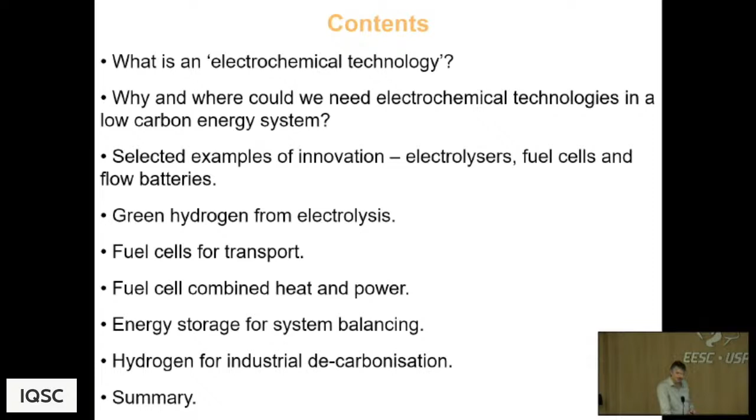So what is an electrochemical technology? And I'm going to talk about it in the context of fuel cells. Now, a number of you here in the room work on fuel cells, so my apologies if I'm going to tell you things you already know. But we'll start with the chemistry and then try and work through to the technology. And a lot of you here work on catalysis, and of course catalysis matters.

So an ion conducting material, which is the electrolyte, and two electrodes which are in contact with that ion conducting electrolyte, where we have charge transfer reactions. And this is where the electrochemistry happens. So to take the PEM example with hydrogen, obviously hydrogen here is our fuel. It's coming in on what we call the anode.

And there's a charge transfer reaction down here in which, in a catalytically active region, the hydrogen molecule will form protons and electrons. And those electrons can be carried away through a current collector, and the protons will transport across the membrane, provided the membrane is a proton conductor. So obviously here we're using proton conducting materials.

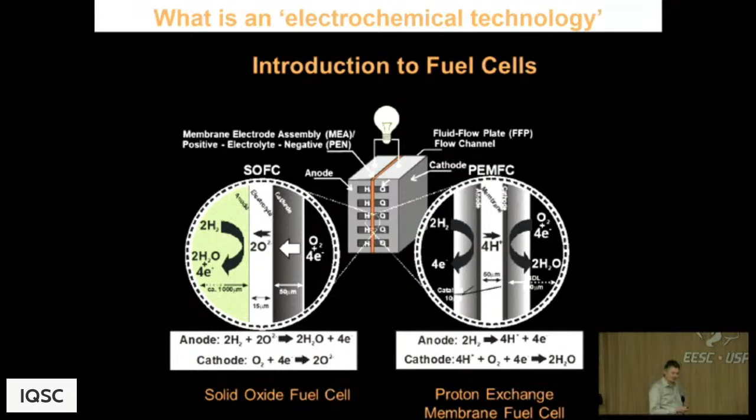An integrated system that you can use as an end user who doesn't really care that it's a fuel cell. They just want something that, in this case, will produce power efficiently from a fuel and work every time they switch it on. They don't really care, by the way, what the catalysts are. They just care what it costs and that you can make it the same each time. So, of course, in the science labs, we care a lot about this. And in applications, we care a lot about this. So you need an integrated perspective. So when I'm talking about the subsequent technologies, ultimately, this is where we need to get to with all of them, some equivalent of this.

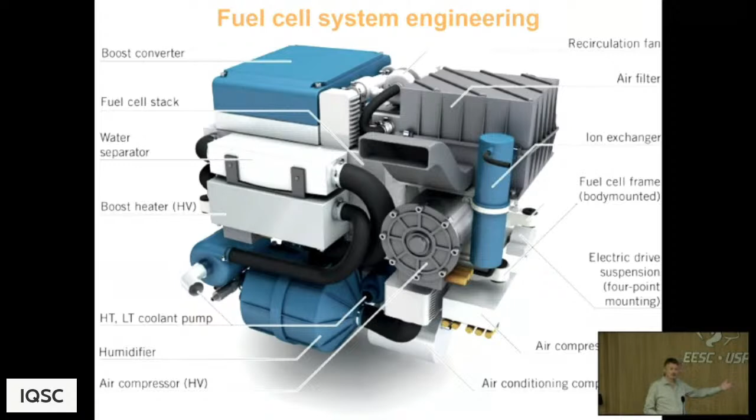Okay, so why does it matter? So I spent a lot of my career of late, less so now, trying to persuade people that these technologies are important. Because for a long time, people haven't really felt that they were important. And why actually are people now getting interested? So this is the UK energy system. Just to talk it through, this is energy in gigawatt hours per day.

The UK is a small place, don't forget. So this is gigawatt hours per day. This is time by year. This is all real data. It's put together by a colleague who does really nice work in this area at the University of Birmingham, Grant Wilson's team. And this is the flow of electricity through the UK energy system, which is this squiggly line at the bottom.

You probably can't read that number there, but in 2022, the UK's electricity was 39% gas and 1.5% coal, but everything else was low carbon. So we've actually made good progress in decarbonizing this, but you can see that sadly, it's the least important part of our energy system in terms of the amount of energy flow.

But it's probably the most important part of our system in terms of the potential for decarbonization. So that's electricity. You see some seasonal variation. So this is our winter, right? And this is our summer. So there's a little bit of a shift between summer and winter.

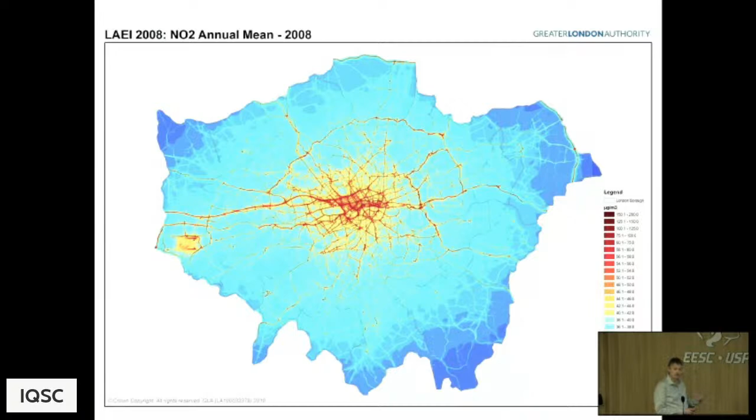So these are coming entirely from transport, right? These are all transport-related NOx emissions off internal combustion engines. And so trying to move away from internal combustion engines is not only about carbon, it's also about air quality. And there's huge, increasing amounts of policy intervention going into driving these changes.

Okay, so one of the things when you talk about electrochemical tech is the topic of hydrogen. So hydrogen is potentially a low carbon fuel, a low carbon energy carrier. I'm going to talk more about it. And of course, we make hydrogen commercially today. We make it at a large scale.

The world makes about 100 million tons or so of hydrogen a year, 98% of it made from natural gas or coal. All of it effectively for either making ammonia as a fertilizer or chemical feedstocks like methanol or refining petrochemicals. It does not make hydrogen as an energy carrier, it makes it as a chemical feedstock.

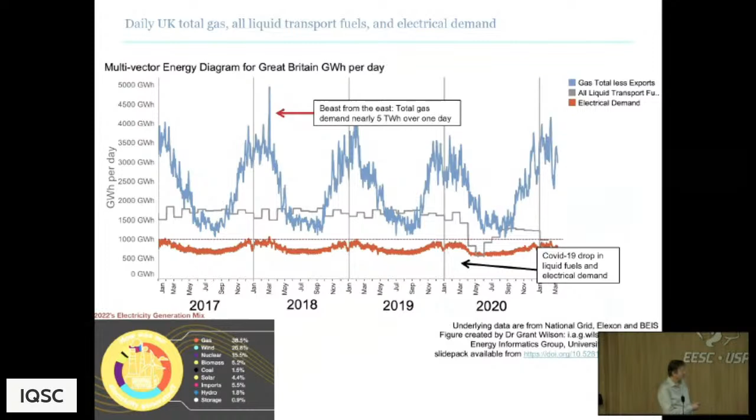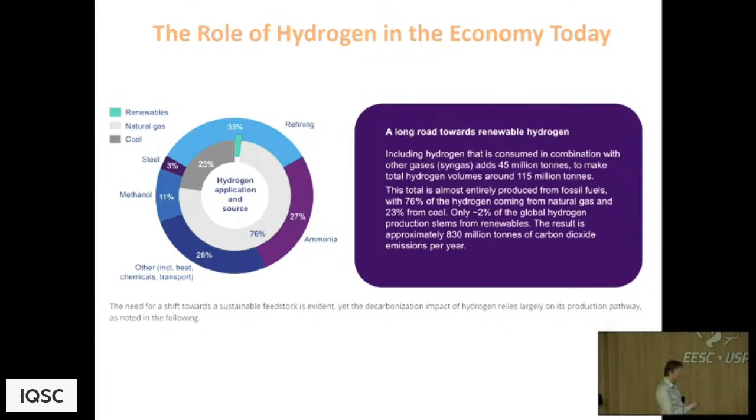But if we're going to want low carbon molecules in here, as well as our natural gas or our fossil fuels, the next easiest low carbon molecule to make is hydrogen from splitting water by electrochemistry. It's the electrochemistry I'm going to focus on, but you can make it other ways as well. So this is a color map of all the different routes to hydrogen.

I have to say, given the conversations here in Brazil, I don't think there's a color for ethanol-derived hydrogen. So we need to think about a color for ethanol. Or someone has, it's just not on this picture. So what's the color of hydrogen if it's made from ethanol? I have no idea. Because strictly green hydrogen is made from renewable power, but it could equally be made from ethanol. Anyway, interesting question.

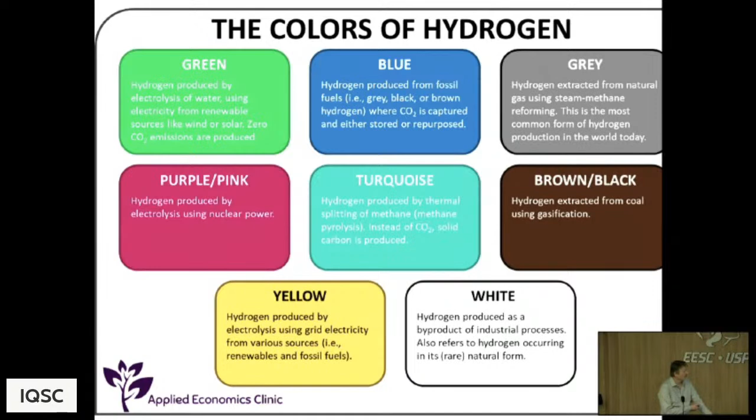So there are many different colors of hydrogen. The two most commonly people refer to in the context of low carbon hydrogen are green, which is largely by electrolysis, or blue, which is largely from natural gas with carbon capture and storage. So this is zero carbon, arguably. We'll look at that in a moment, and this is low carbon. But you can make it by all sorts of other routes, and there are lots of different colors, but those are the main two.

So once we start thinking about hydrogen as an energy carrier, or indeed any fuel as an energy carrier, we have to think about its carbon intensity. And why is that? Because hydrogen, other than in very unusual circumstances, does not exist naturally. It's in the form of water, it's in the form of methane, it's in the form of hydrocarbons, and you have to put energy in to separate the hydrogen from its carrier, right? You have to put energy in to make hydrogen from water, for example.

So this is some work of an organization trying to create a green hydrogen standard. I just think it's an interesting example for us all to have in mind. So they've defined a green hydrogen standard of 1 kilogram of CO2 equivalent per kilogram of hydrogen, bearing in mind that today it's around 10 kilograms of CO2 per kilogram of hydrogen if you make it from natural gas. So today's hydrogen from natural gas is about 10. And so this is 1. So that's the target.

But then you have to start to think about, well, what are we including in that, right? So this is suggesting all of the energy input streams should go in, and all of the implications of the production processes should go in. But it doesn't include upstream emissions, and it doesn't include downstream emissions. But in practice, from a societal perspective, we need to think about upstream and downstream emissions, as well as the energy inputs, as well as the processes.

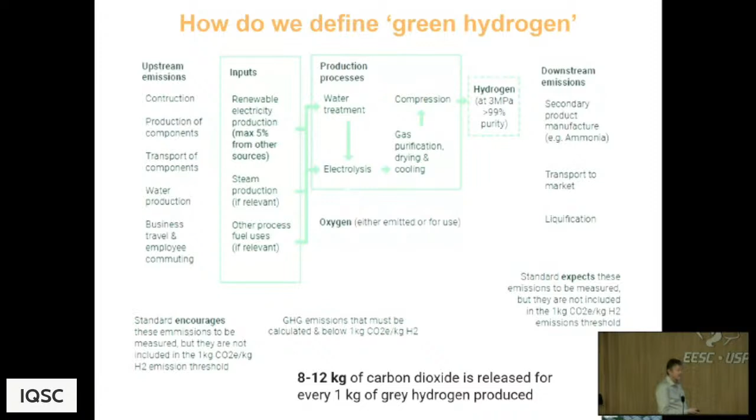So when we talk about something being zero carbon, it's never actually zero carbon, because there's so many other input streams that are going in. But it's important, particularly as scientists and engineers, that we're very open and aware of these energy and mass balances when we're starting to think about challenges around sustainability. So that's why I think this is quite a helpful slide. And this is a paper we wrote some years ago about the role of hydrogen in the economy tomorrow.

So if you go back to the 60s, John Bockris gave a talk at General Motors where he spoke about the hydrogen economy, and there was lots of excitement in everything being powered by hydrogen, and you wouldn't need any other form of energy carrier. The reality is that will never happen.

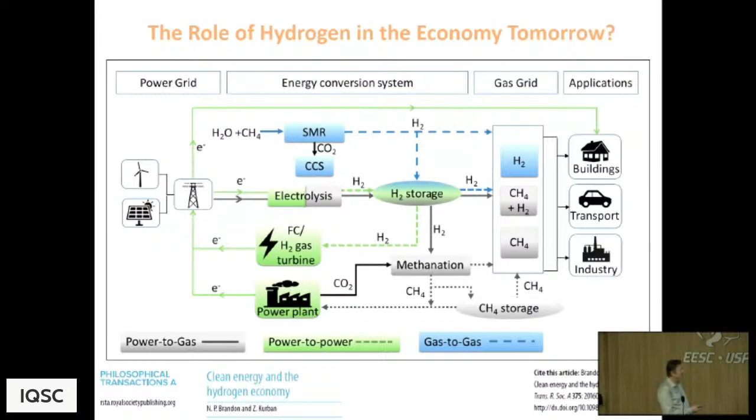That is not what it's going to be, but we will see increasing amounts of low carbon molecules, hydrogen or its carriers like ethanol or methanol or ammonia, in the energy system in support of electrification. And it's this partnership between electrification, because if you can electrify, that's what you should do, and low carbon molecules where you can't electrify because it's not cost effective or functionally possible, or the electricity is being made where you don't need it, for example, in the middle of a desert, when you need to start to think about making molecules. So this is a cartoon of the role of hydrogen in the economy rather than the hydrogen economy. Okay.

Just talk a little bit more about this before I go back onto my electrochemistry. I gave this slide in September, not here, but at the Sao Paulo campus in Sao Paulo City. I thought it's worthwhile rephrasing it. And this is about the costs of grey and blue hydrogen. So this is hydrogen from natural gas. And obviously if you're making hydrogen from natural gas, it will cost more per unit energy than the natural gas, right? It's got to, because you've done stuff, separated out CO2, stored CO2.

This all costs money. Historic gas prices in Europe, 20 euros per megawatt hour. We'll talk about where gas prices are today in a moment. And obviously the price of the hydrogen goes up as the gas price goes up, okay? About 2 euros per kilogram at 20 euros per megawatt hour. This is the natural gas prices in Europe. When I last came to Sao Paulo, it was September last year, and we were about the peak of over 250 euros per megawatt hour relative to the historic of 20. So we had over 10 times increases in gas prices in Europe.

If you look at the energy dependence in the winter in Northern Europe and the amount of gas we use, you can see the pain point that hit everybody in Northern Europe this winter. We didn't run out of gas, but it's been a very expensive winter. In the UK, which is a relatively wealthy economy, the government have provided direct subsidy to everyone to help them meet the cost of their energy bills this winter. So it's been a big deal.

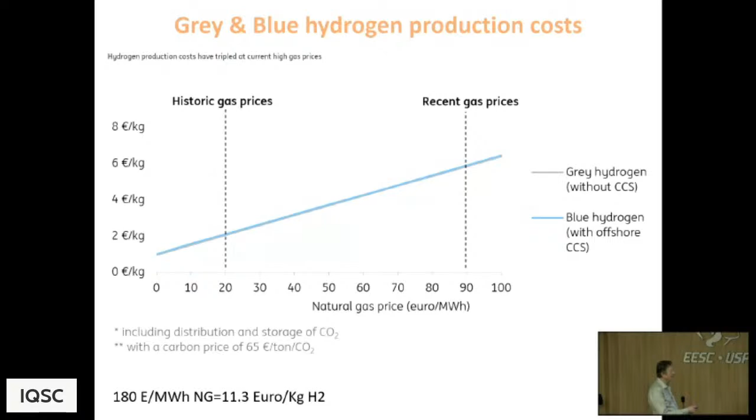If you're looking at historic power prices, you can see we're about 4 euros per kilogram for green hydrogen. And that's why when you read things, people say, well, look, green hydrogen is great, but it's a lot more expensive than blue hydrogen. Well, that's true, except when the gas price goes up to 50, you're now at 4 euros per kilogram, which is where you are with green today. Now, the green hydrogen price, therefore, is going to be heavily advantaged in countries with low-cost renewable power. And that's one of the reasons you're seeing the Middle East and Australia make huge investments and bets on green hydrogen. You'll see the same in Southern Europe, in Spain, in Portugal, where they have very low-cost advantaged renewables.

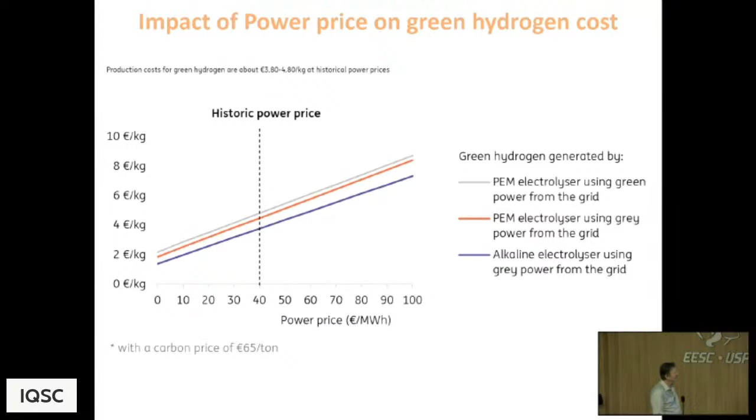So there are some really interesting geopolitical questions around who's going to be producing this in the future and where it will be produced and how you move it around the world and so on. Okay, so there we go. Let's dive into some technology stuff. Okay, so I'm not going to spend a lot of time on these, but just to give some flavor, right?

So alkaline electrolysis, we're going to talk about electrolysis. So electricity in, hydrogen out, water splitting. Alkaline electrolyzer has been around for 100 years, very mature. You can buy a 100 megawatt system and go and put it in a desert in Saudi, which people are. So it's a mature technology.

It relies on this kind of potassium hydroxide, porous diaphragm soaked electrolyte membrane. Because it's porous, one of the challenges with this technology, you can't make hydrogen at pressure very easily because you can't manage the pressure drop across this porous membrane. It's about 65% efficient. This is a kind of flow sheet, lots of balance of plant, takes up a lot of room, but it's the cheapest form of technology today and available at scale.

PEM electrolysis, relatively new, comes effectively quite substantively derived from PEM fuel cells, but not the same. Again, has these proton conducting membranes, has to have catalysts in it. These electrodes are catalyzed. These catalysts at the moment are quite expensive materials and they're quite rare materials. And I know that people here and elsewhere around the world, of course, are working to find replacements.

So platinum on the hydrogen side, iridium and ruthenium on the oxygen side. Iridium is the rarest metal in the world. So, you know, there is a concern about cost and there is a concern about material security.

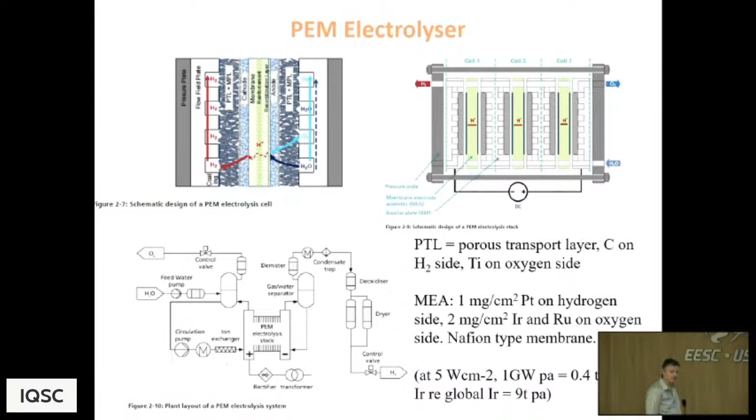And then the technology I work on, I'm very interested in, which is high temperature electrolysis. So we're now talking about the electrolysis of steam. This is not a mature technology. You can't go and buy one. But the motivation here is all around the thermodynamics.

So if we look at temperature, the Gibbs energy, and if you remember earlier, I said that the Gibbs energy is related to the voltage you produce from a fuel cell. It's also there for the voltage you need to put into an electrolyzer. So as the temperature goes up, the Gibbs energy goes down, which means you need less electrical work to split water, compensated with heat. Still need the same amount of energy because the enthalpy hasn't changed very much.

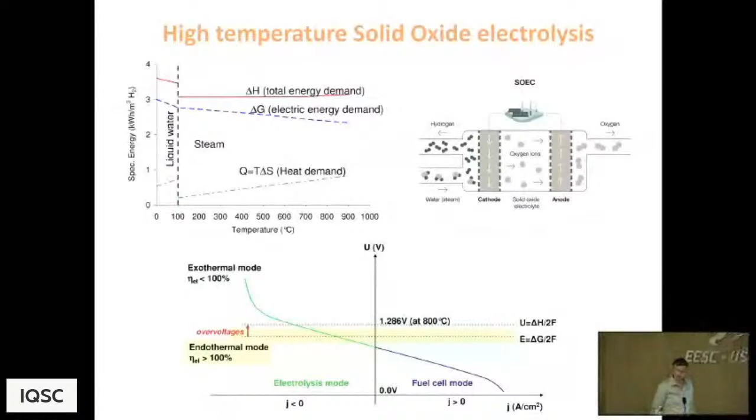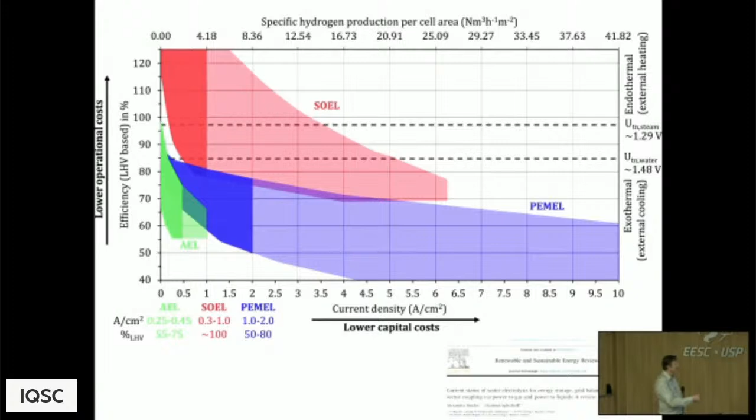This is a paper from a German group, which I quite like to reference, and it paints a picture of these different technologies. So this is alkaline electrolyzers, conventional alkaline electrolyzers. There's a whole field of alkaline membrane electrolyzers, which is very interesting, but they're not on here. PEM electrolyzers and solid oxide electrolyzers. This is efficiency. This is current density.

So current density, higher current density, smaller bits of equipment should be cheaper. Efficiency obviously lowers your power consumption. That matters because 60 to 80% of the cost is the cost of the power. So if you can be more efficient, that makes a big difference. So the reason we're interested in high temperature electrolysis is we can get north of 90% efficiencies, already demonstrated by people like Sunfire in practical systems, close to 90%.

In principle, now we have to be careful here with our thermodynamics, you can get over 100% efficiency. And of course, you can never get over 100% efficiency. It doesn't make sense. So this is effectively... it's correct, but it doesn't allow for the heat.

So to be over 100, we've effectively got an endothermic water splitting reaction in which we're injecting additional heat to balance that endotherm, and that gives you an apparent electrical efficiency of over 100%. Total efficiency, of course, can't be over 100%, but you can recuperate heat effectively to displace power. But even without those tricks, you get very high efficiency, right? So it just paints you a map of the different technologies and their pros and cons.

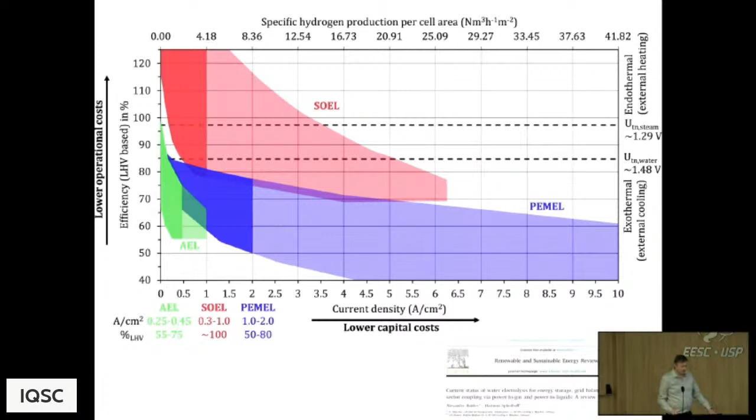So I'm going to talk a bit about solid oxide electrolysis because it's the area I work on. And I know it's also an area of interest in general here, with some work going on solid oxide in Brazil and at USP. And you've got three broad types of technology when you talk about solid oxide. So these are the ceramic devices, right, to remind us. So in all of these cases, you have an electrolyte, which is this brittle ceramic material. It's an oxide ion conductor.

So when we're trying to think about solid oxide devices, we have to be really thoughtful about what our electrolyte is, and there aren't that many choices. And because it's a ceramic, it's brittle. So they don't bend. They don't take strain very well, they crack. So we have to think about how we engineer this ceramic to be mechanically supported. And there are three approaches to this.

The most common one is to use what's called the fuel electrode, the anode in fuel cell terms, it'd be the cathode in an electrolyzer, but this electrode that's on the hydrogen side is the mechanical support. It's a porous mixture of metal, usually nickel, and the electrolyte. And then a thin, like 10 micron thick, electrolyte, and then an air electrode. That's called an anode supported cell, and that's probably the one that most people are developing around the world.

Then you go to an electrolyte supported design. Here the electrolyte's about 10 microns thick, here the electrolyte's about 150 microns thick. Human hair is about 100 microns thick. But at 150 microns, it's strong enough to support its own weight. This is the type of technology that Bloom use in their solid oxide fuel cell, for anyone who follows that. This is a FuelCell Energy type technology. And that's okay, but of course, at 10 times the thickness, it's got 10 times the resistance. And you've got a lot of relatively expensive material.

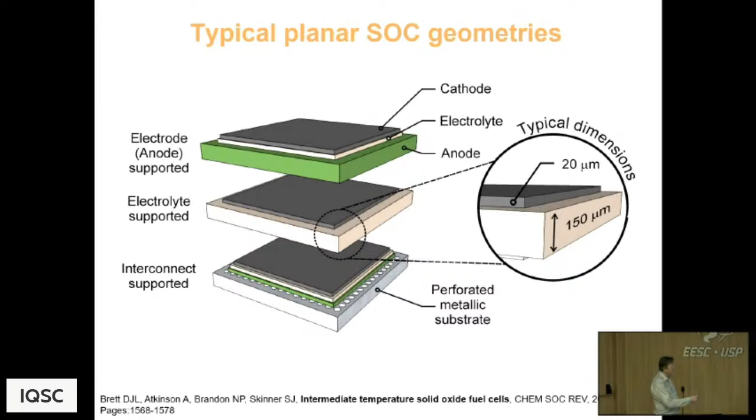And if you look at a cross section through, this is just a sort of generic electrolyte supported cell. So this is your sort of 120 or so microns electrolyte. Your air electrode, which tends to have a couple of different microstructures, high surface area where you want the catalysis, coarser where you want the current collection, and a fuel electrode, which again has high surface area where you want the catalysis, coarser where you want the current collection.

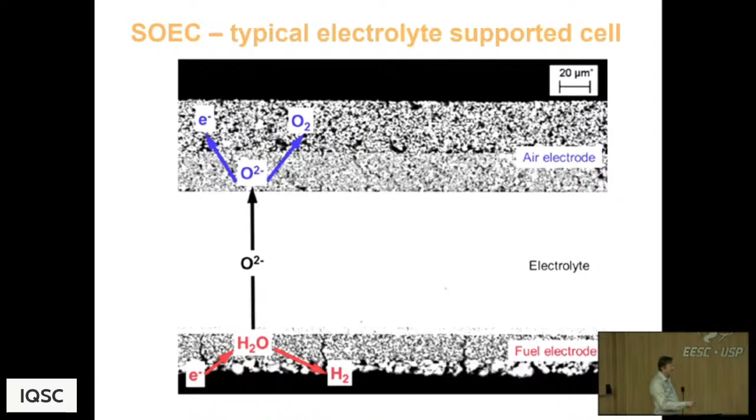We called it Ceres because it uses doped ceria in the electrolyte, and that's where the Ceres name comes from, who's also the Roman goddess of grain and life. So some simple geometries, and that's the core patent, and we created a business off that, and we went off and raised money. So that's the business that's now worth about 350 million pounds. Sadly, I own almost none of it by now.

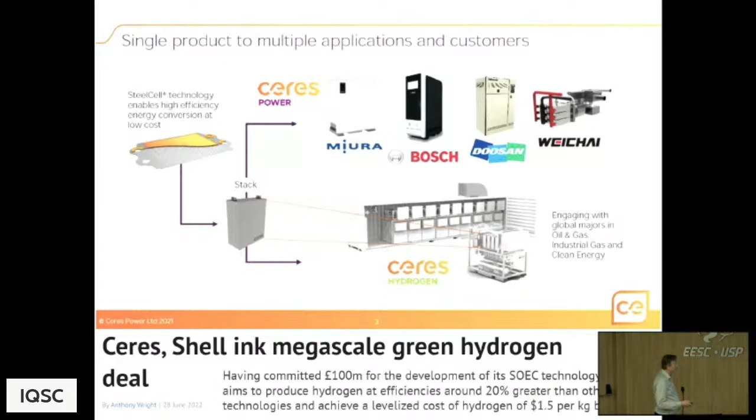And most recently and relevant to the electrolyzer story is that they're developing an electrolyzer variant of this as well, and it's public knowledge that they're putting a 1 megawatt machine into India in partnership with Shell at the moment.

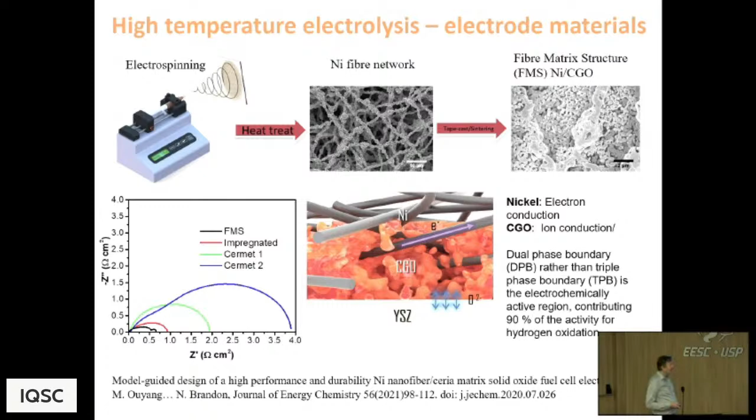In terms of what we do in my group, in our research, we remain very interested in some of the fundamentals and how you continue to evolve the materials. So we're doing things like electrospinning to produce interesting fiber structures, which we think are much more robust, particularly focusing on electrolysis mode, where you can have problems with nickel migration at the high steam concentration. So we're interested in developing novel fibrous structures for these applications, which we continue to work on today.

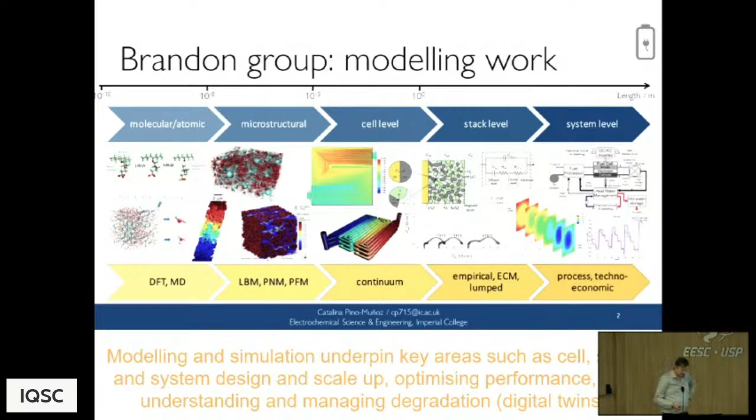Okay, conscious of time, I shall march through some pictures on transport. So this is our Toyota Mirai, which we've had at Imperial. Toyota have recently taken it back. I understand that USP are going to get one of the new Toyota Mirais, which I look forward to seeing. I don't know if we're getting one, but you're getting one.

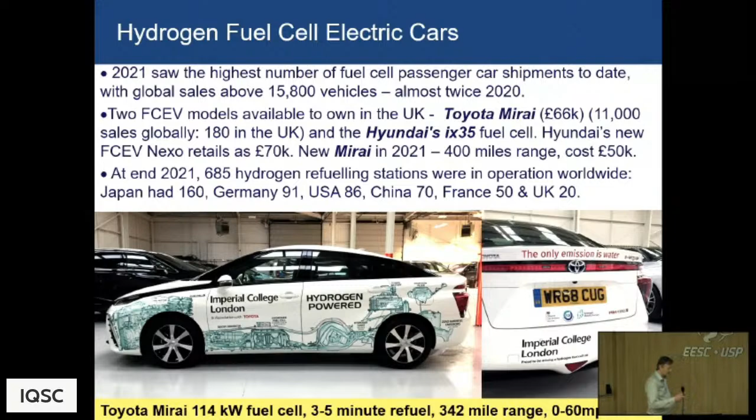But I have to say, light-duty transport is not the cutting edge of hydrogen for transport at the moment. I think battery electric is the cutting edge. Let's see where hydrogen and fuel cells for light-duty transport get to. But batteries are a tough competitor. But I do think as the vehicle size goes up and the amount of energy you need to carry on the vehicle goes up, then hydrogen fuel cells, or fuel cells in general, become a really attractive solution for electrification.

Buses, particularly public buses in Europe, noting the issues around air quality, are of growing interest. Hard to do with electric, definitely possible with hydrogen fuel cell.

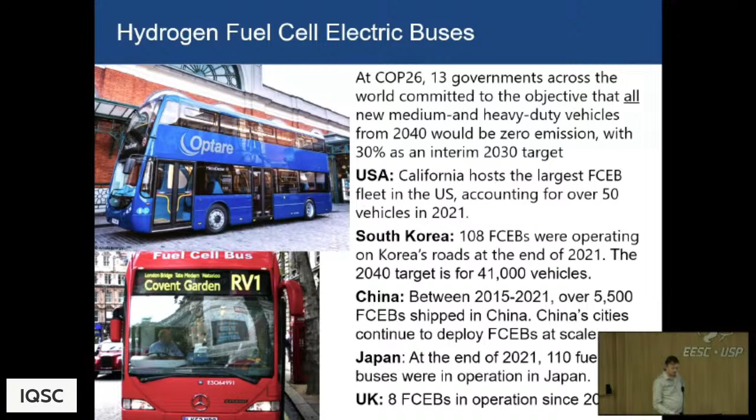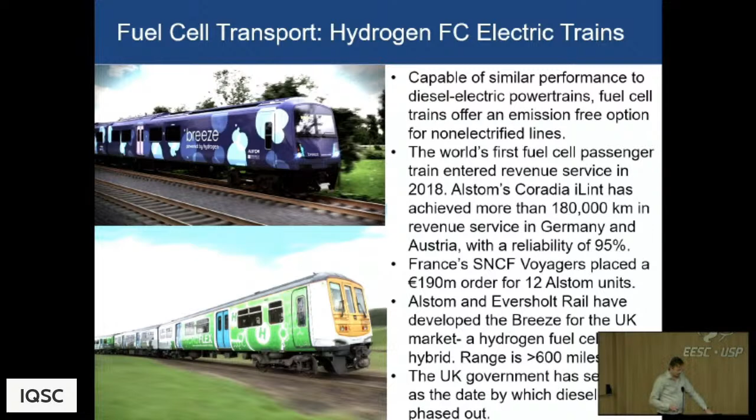Trucks, so heavy-duty vehicles which need high amounts of energy. Again, there are companies seeking to electrify trucks with batteries, but there's an equally fierce competition going on about electrifying trucks with fuel cells.

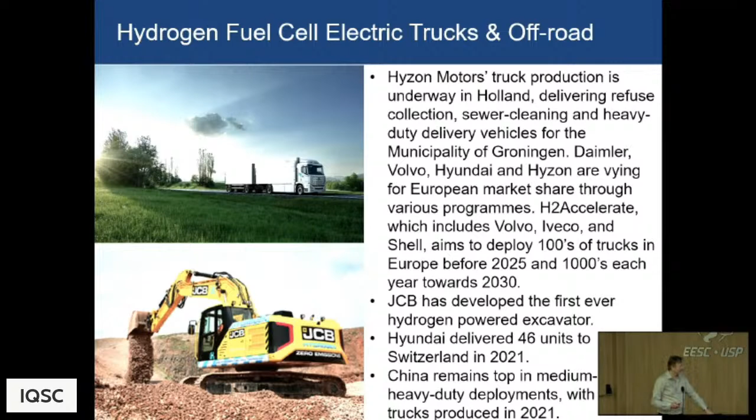And indeed there are companies looking at hydrogen combustion trucks, not electrochemical tech, which produces lots of NOx. I don't know if it's the right answer, but obviously it's an area people are looking at. So heavy duty vehicles are a really interesting space.

And then maritime. I was in Singapore a few weeks ago, and there's huge interest in how you decarbonize shipping. That has to be done with a low carbon fuel. You can't do it with batteries beyond some small inshore craft. So what is the future of shipping fuel? Whether it's hydrogen or ammonia or methanol; we should also consider ethanol, but no one is at the moment. A really important space.

Someone gave me the statistic, and it was Shell that gave me the statistic, so I suspect it's broadly right, which is that the 16 largest ships in the world consume the same amount of fuel as all of the world's cars. So a very big energy consumer.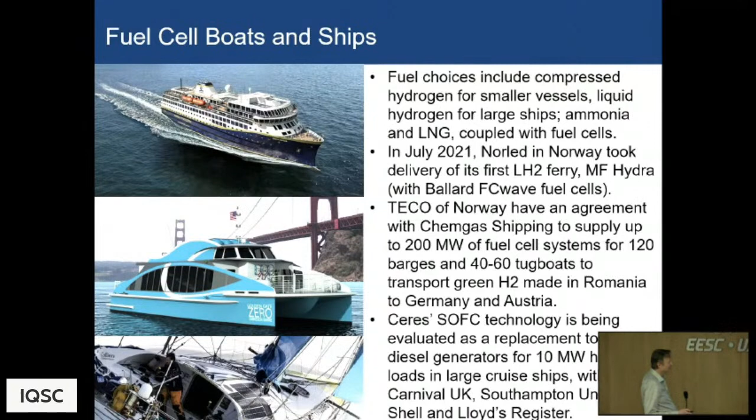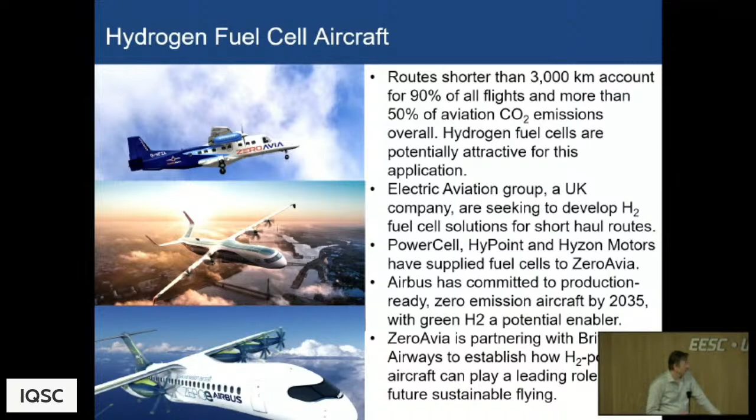And then, of course, the toughest space of all, which is aviation. What are we going to fly around the world in? It's not going to be batteries, so it's got to be a fuel. Is this where we make synthetic fuels? Because all synthetic fuels are made from hydrogen anyway. So we're doing some work with one of these companies in the UK developing hydrogen fuel cell solutions.

Where's the innovation in fuel cells? My colleague Anthony Kucernak was here a few weeks ago. He may have spoken about his work with Bramble, which, it's not my work, but I think it's a really interesting idea where you take printed circuit board technology and make fuel cells using it. Easy to say, hard to do, but it's a really neat idea.

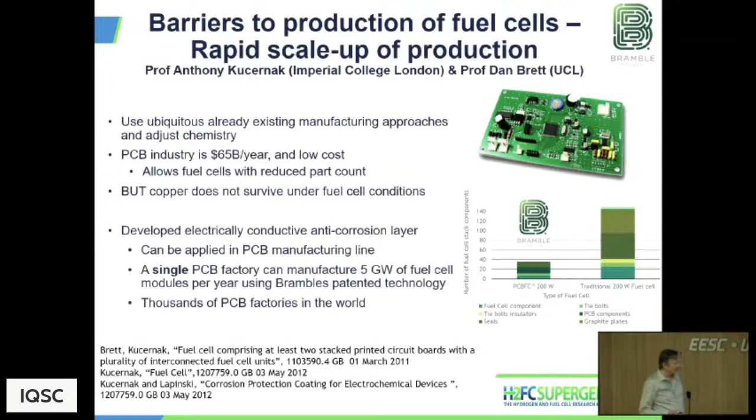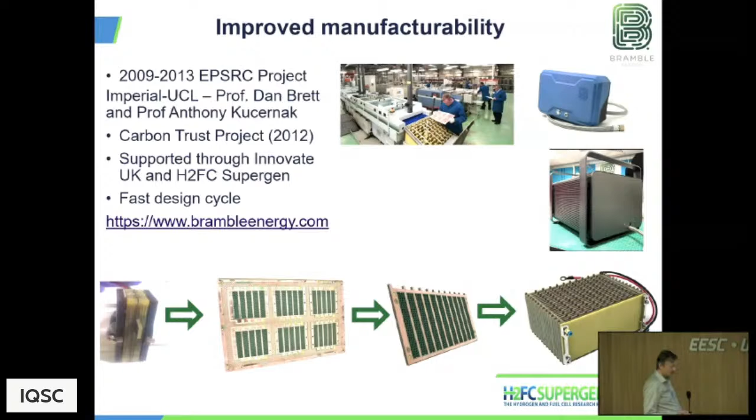These are his slides. I think it's another example of how you take breakthrough ideas in a laboratory concept, which give you manufacturing advantages, and take them into commercialization. Recently they've raised a very substantive amount of money to take that technology forward. So it's a really interesting approach.

I have to, of course, cite the project we're working on here in Brazil with Shell as well, which is looking at solid oxide fuel cells running on bioethanol for transport applications. That's a program we're working on, and I think it's a really interesting challenge. It's a research project here in partnership with Shell, which we'll have a workshop on tomorrow.

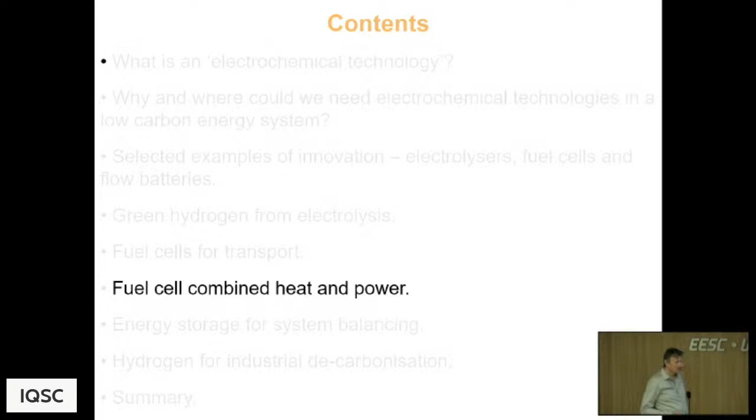Outside of transport, fuel cells produce power and heat, so they are very useful for applications where you need power and heat. I've shown already the challenges of natural gas in a country like the UK. This is a report we wrote through our Sustainable Gas Institute some years ago. It looks at the number of households connected to the gas network, meaning the natural gas network.

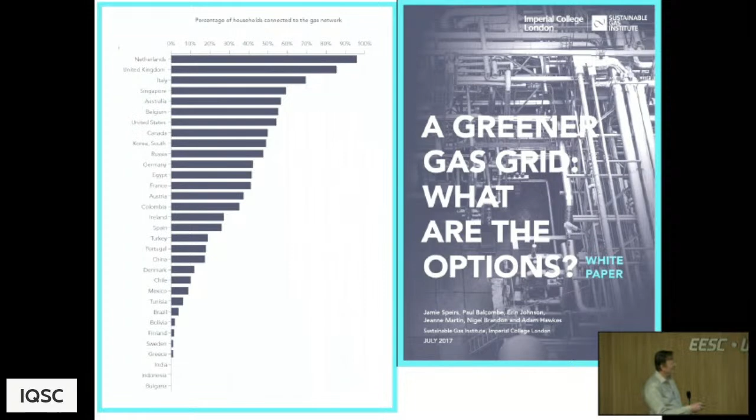The UK has the second highest fraction. The highest fraction is the Netherlands, of course the other side of the North Sea. Then Italy, Singapore, Australia, Belgium, and so on. I suspect Brazil, here's Brazil. So it's not such a big deal here, at least when we wrote this report in 2017. So how do we get away from that?

Well, one of the things the Japanese are doing is to use fuel cell micro combined heat and power units. They put a fuel cell in the home, and it produces power for the home. It supplements rooftop solar, for example, and there's the waste heat that the fuel cell produces. If the fuel cell is 50% or 60% electrically efficient, it's producing 40% to 50% of that energy as heat, and a solid oxide fuel cell produces that as steam. So you can use it to heat your home or produce hot water.

There's over 400,000 of these now installed in Japanese homes. Not running on hydrogen, running on propane and butane, but they could run on hydrogen in the future. And I should stress that you can now buy fuel cells. People are selling fuel cells.

If you look at the market from this fuel cell industry review, a very useful document that E4Tech produced, you can see that it's dominated by PEM fuel cells. This is by fuel cell type in terms of numbers of shipments, and this is in terms of megawatts. It's dominated by PEM for transport, but the next most dominant one after that is solid oxide. These are the units, for example, for that Japanese program, which is so dominant in terms of numbers.

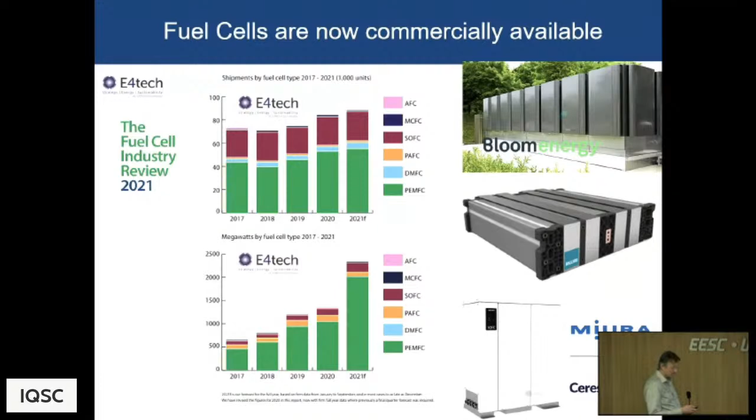So things are happening. This is a Bloom power unit, which you find a number of in the US. This is the Japanese product, the Ceres Japanese product with Miura. I'm conscious of time, so I'm going to just move on swiftly.

The other thing with hydrogen, which is for countries going for very high renewables: how do you provide a resilient system that doesn't rely on having natural gas backup? At the moment, we back up what renewables we have in the UK with natural gas. But if you aren't going to use natural gas, you can't do that.

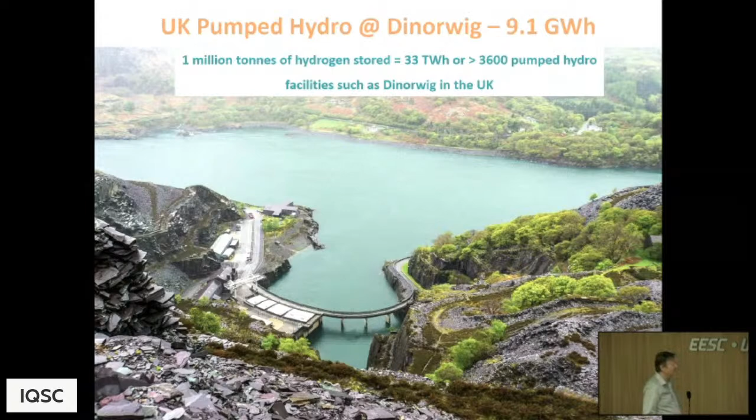And so there's been some nice work done in Germany looking at the technical potential of underground hydrogen storage. What you do is you take a salt deposit, you solution mine it with water, you create a cavern, and you put the hydrogen in there. That is not science fiction. We already have one of these in the UK. The US have lots of them. They're used as backup systems for petrochemical facilities, so it's entirely practical. But obviously you need a salt deposit.

And not everywhere has a salt deposit, but they did a technical assessment of the salt deposits across Europe. And here we are in the UK. Given that we need some tens of terawatt hours, we actually have the capacity for over 1,000 terawatt hours. And many other countries in Europe do as well. So there's some interesting options for long-term strategic reserves using things like hydrogen.

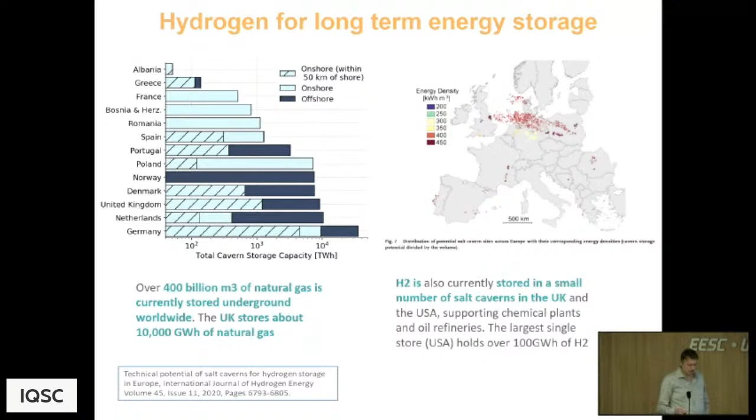So a flow battery, just in very brief terms, this is a vanadium flow battery, which is the current commercial incumbent. A vanadium flow battery, as the name suggests, has a liquid electrolyte comprising an acidic solution of vanadium salt. And you can change the oxidation state of vanadium. It sits in 4 oxidation states. So you can have a 2,3 couple and a 4,5 couple.

So you can create the 5 oxidation state and the 2 oxidation state by charging the electrolyte up when you've got power. And then you can flow that back through the same cell, and that will work then in fuel cell mode to generate the power back. That gives you about an 80% round trip efficiency. So you get about 80% out of what you put in. But it has the big advantage that if you want more energy, you just have more electrolyte. So with a lithium-ion battery, if you want 10 times the amount of energy, you need 10 times the number of batteries.

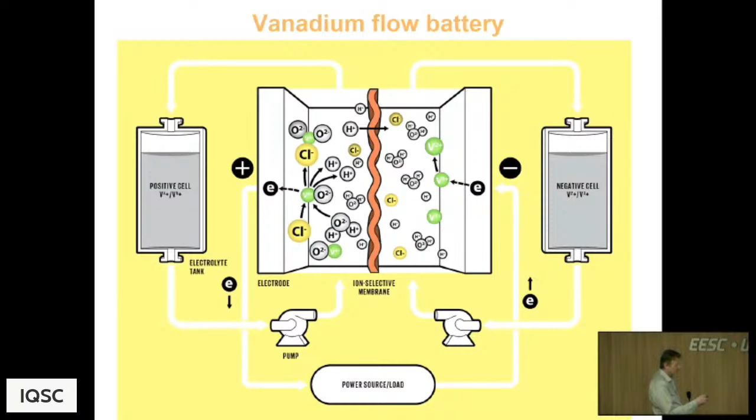And so that costs 10 times as much. With a flow battery, you just make the tank bigger. So the cost scaling doesn't scale linearly because tanks are cheap. It depends on the cost of the electrolyte. So for long periods of storage, like 10 or more hours, flow batteries are of interest.

So again, just to pick up the narrative of going from research to commercialization, this is work I do with Anthony Kucernak, who was here, as I said, a few weeks ago, and other colleagues, of course. Academically, we created some patents on a novel chemistry, which we've also published because it's important to get peer review of what you do once you've patented it. And we've taken that out into this company, RFC Power, and that's now scaling this up.

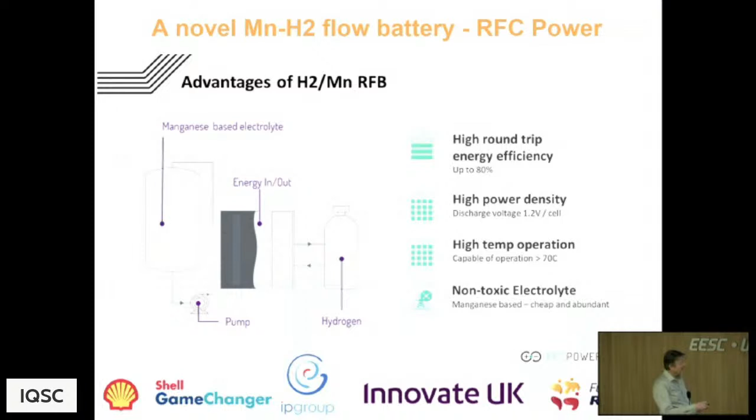And the key is that it uses hydrogen in a closed loop on one side and manganese in solution on the other side. So it looks something like this. This manganese solution is a far better alternative to vanadium. It's a fraction of the price, 1/10 the price of vanadium. It's very abundant. You will find manganese in every primary battery that you have. Every little Duracell battery is full of manganese.

And on the other side, we have hydrogen in a closed loop. So it works like an electrolyzer or fuel cell on the hydrogen loop side. And hydrogen is a very facile reaction. It's much quicker than the vanadium equivalent, so you get high current density. The manganese is very cheap. The hydrogen can, of course, in time be coupled into a hydrogen system if there was one, so you wouldn't even need a hydrogen loop. But at the moment, we have a closed hydrogen circuit.

You do have a problem with the manganese disproportionation reaction. And Anthony's group did some really excellent work to find a way to stabilize that and stop that disproportionation reaction or manage it. So that's where we are with this technology, and we believe it gives very low cost, and it's being scaled up at the moment.

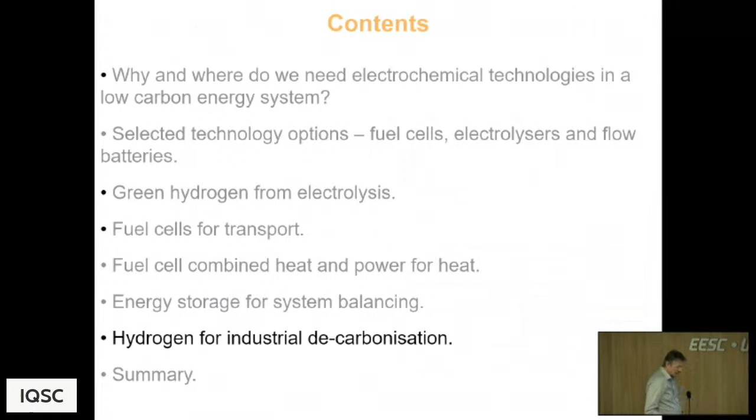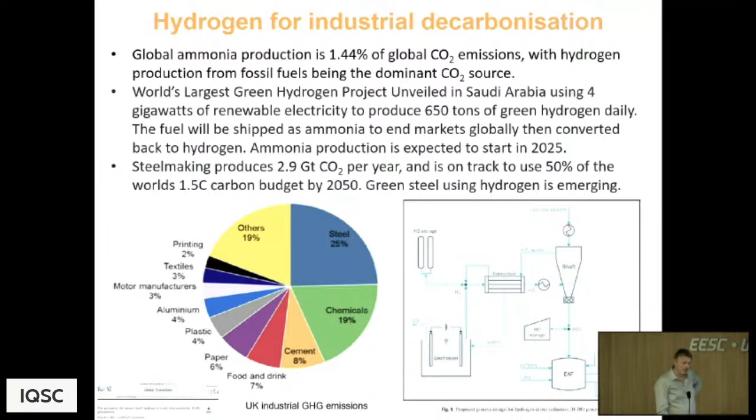And then finally, the last slide is about decarbonization of industry, which is another huge issue: how do you decarbonize the steel industry? For example, if we continue to make steel the way we make steel, steel alone will use up half of the world's carbon budget for a 1.5 degrees C climate scenario. Of course, we make steel using coke, so you can think about using hydrogen to replace that. But I'm going to stop at this point and just go to my summary slide.

What I hope I've shown you in my whirlwind tour is that for those of you working in electrochemical technologies, this is actually a really important space. Not everything will be electrochemical, but electrochemical will be a very important part of the system of the future because of its efficiency, its flexibility and its conversion between molecules and electrons. I hope I've shown you that hydrogen and the carriers of hydrogen, like green ammonia or methanol or ethanol, big deal here, of course, it's bioethanol, will play an increasingly important role. We are still going to need carbon molecules. I think that's where the biomass comes in.

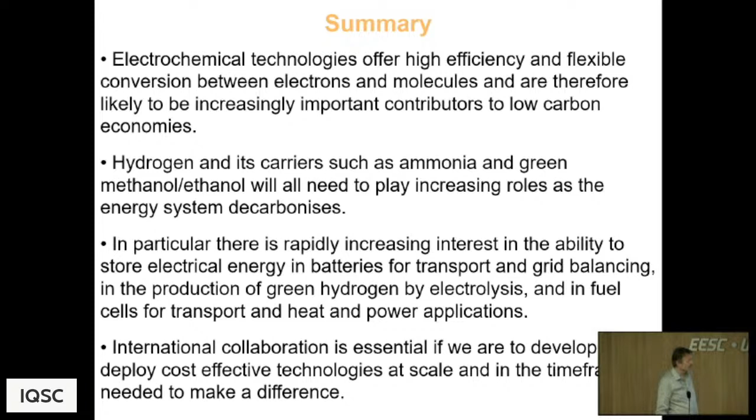And of course, there are some really important challenges which we don't currently face as we continue to put more and more renewables into our energy systems, with intermittency and the need to flexibly balance supply and demand, where flexible high efficiency technologies come in. And I'd just say that international collaboration is important, so it's great to be here. Looking forward to continuing the collaboration, because there's a lot of work to be done and we don't have a lot of time to do it.

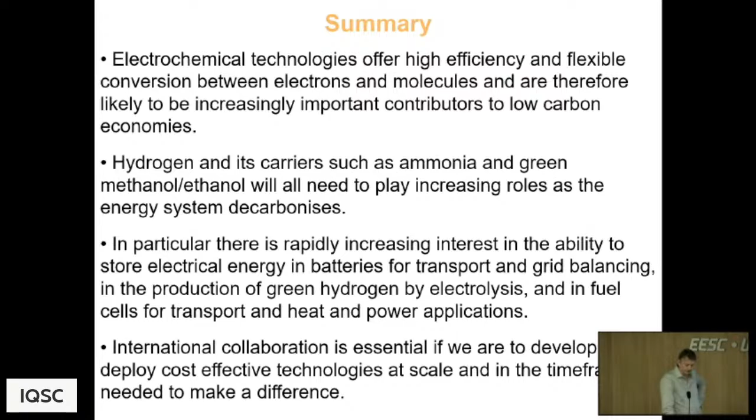But whether you can, even better, yeah. And the second point: is there really a need to change the cars that are filled with ethanol, with the internal combustion engine, to batteries or whatever? I think such a hurry is not really needed for Brazil, maybe. Well, it may not be. I think there's two questions, and I don't know the answer to them.

One is, what's the overall carbon intensity of that chain? And I'm sure someone's worked it out, but I just don't know what it is. So it'd be interesting to compare that. Secondly, air quality. Again, I don't know, but you probably do, what the air quality is like of an ethanol combustion. But you're right to say that you're in a much better place here than everywhere else that is using diesel and gasoline and starting to try and go to ethanol blended gasoline.

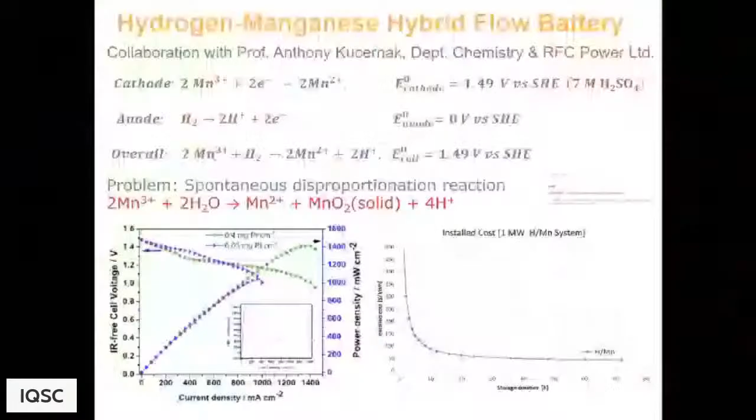The reason we've gone for a liquid gas couple, well, there are several reasons, but one of the benefits is that if you do get a little bit of manganese crossover into the hydrogen side, it's a liquid in a gas, and you can just easily collect it and re-inject it. So that doesn't become an issue.

But you want something that's cheap, very important, because the cost of your energy storage solution depends on the cost of the electrolyte. So it has to be as cheap as possible to be useful, right? So cost matters a lot. It's got to be sufficiently soluble that you can get a reasonable energy density. It's got to be electrochemically facile. It needs to be reversible, because otherwise that lowers your round trip efficiency.

So there are quite a few good review papers on options. Obviously, there are then organic systems and aqueous systems. There's quite a lot of work going on there as well. I'm confident that there's more work that can be done, but quite a lot of work has been done trying to look at different couples. But that doesn't mean there can't still be innovation.

If you are allowed one more question, in this case, from the manganese, is it normal to have a problem with the manganese oxide clogging the membrane? Yeah, so you want to try and stop that manganese oxide forming, or if it does form, you want to stabilize it in a colloidal suspension. So what's written there is the problem. You don't want that to happen. So there are ways of stabilizing that reaction so that doesn't happen.